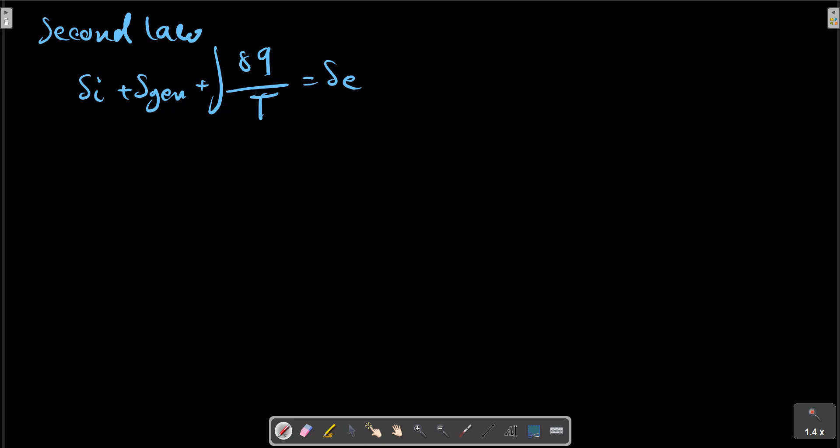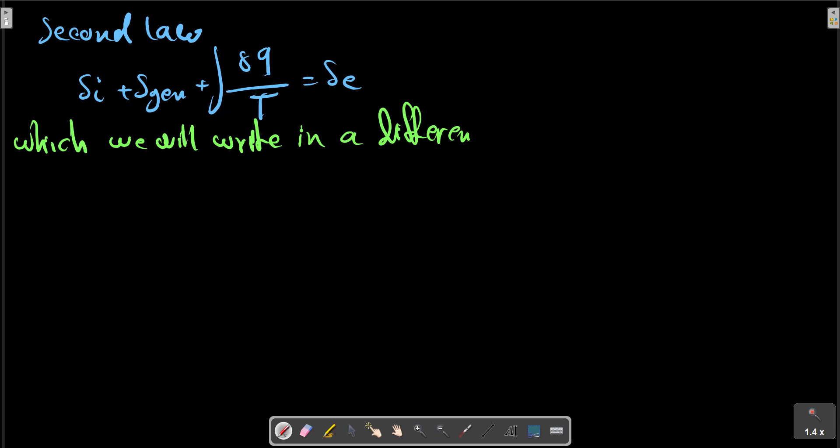And the second law: we have S_i plus S generation plus, which we will write in a differential form as, in a differential form, and we can calculate that delta Q is a path function, T dS minus T delta S generation is a path function also.

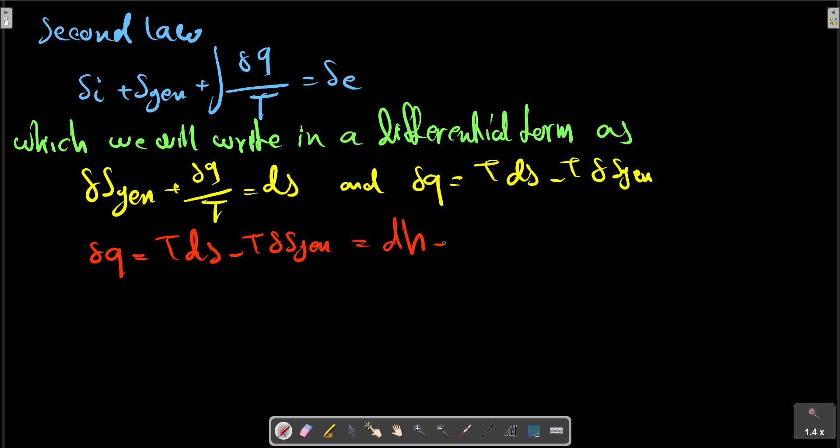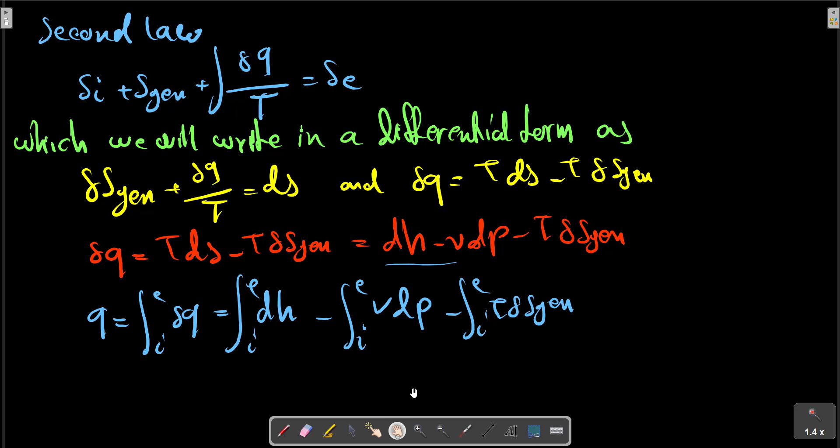To facilitate the integration and find Q, we use the property relation and get this equation as T dS equals dH minus v dP, minus T delta S generation. And we can obtain Q as this expression from I to E, which is equal to dH minus v dP minus T delta S generation, and equals H_E minus H_I minus the integral of v dP minus T delta S generation.

This result is substituted into the energy equation, which we solve for work, which was Q plus H_I minus H_E. This is Q, and also we have, with simplification, we can obtain this relation for work.

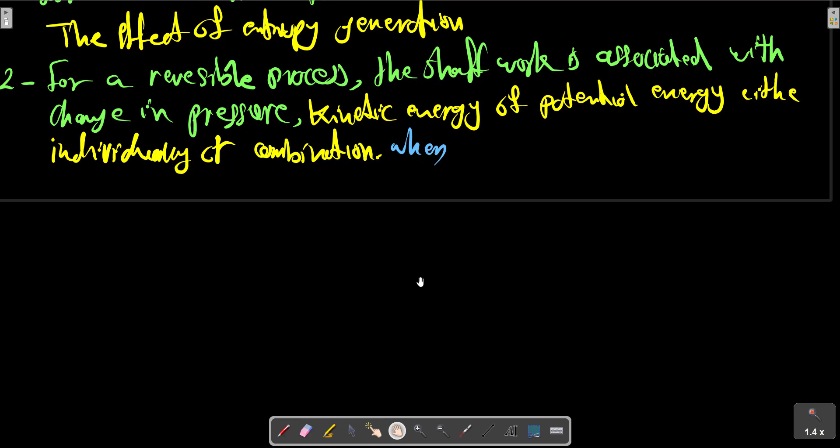For a reversible process, the shaft work is associated with change in pressure, kinetic energy or potential energy, either individually or in combination. When the pressure increases, work tends to be negative. Work tends to be decreased, negative. We must have shaft work in.

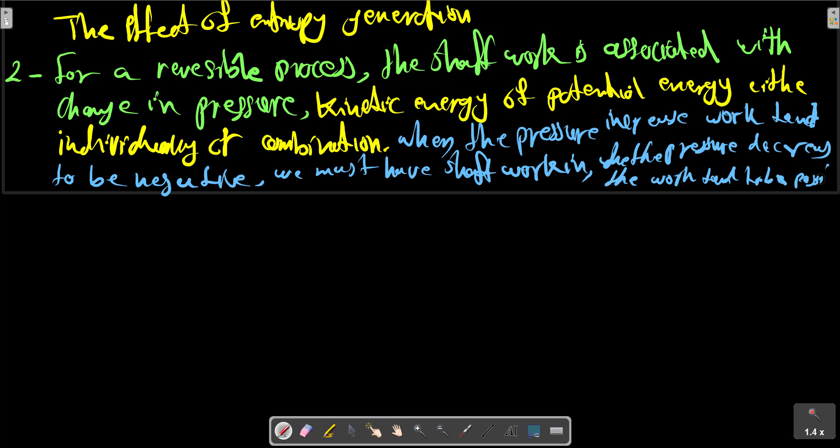And when the pressure decreases, the work tends to be positive. Pressure decrease, the work tends to be positive. Pressure increase, work decrease. Pressure decrease, work increase.

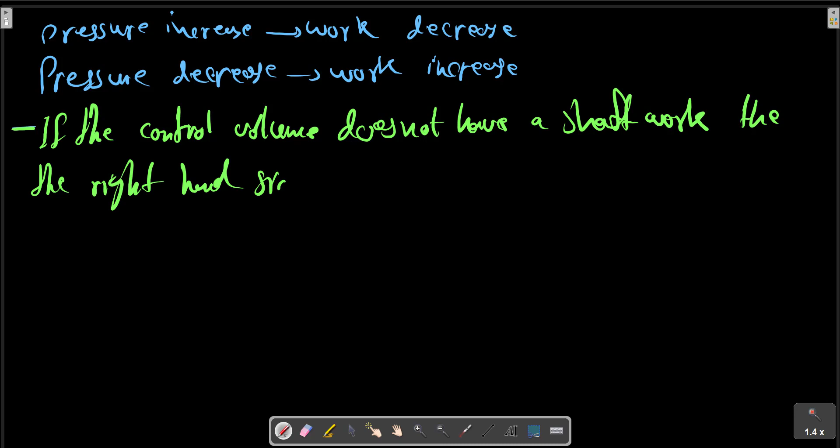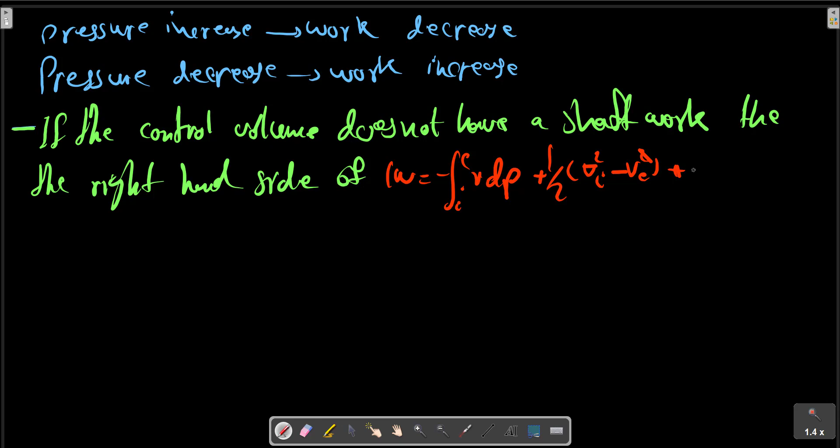The third one: the control volume does not have shaft work. Then the right hand side of the equation W equals... The right hand side of the equation must be balanced out to 0. Any change in one of the terms must be accompanied by a net change of opposite sign in other terms, and notice that the last term can only be subtracted. So then we have this relation equal to 0.

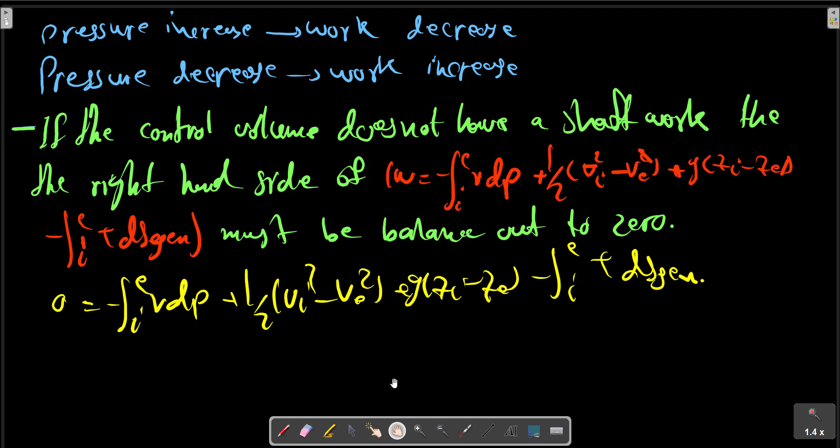As an example, let us briefly look at a pipe flow with no change in kinetic or potential energy. If the flow is considered reversible, then the last term is 0. For a reversible process, this term also is 0, and the first term must be 0 also. That is, the pressure must be constant, with no change in kinetic and potential energy and a reversible process; the equation gives pressure constant.

Realizing the flow has some friction and is therefore irreversible, the first flow term must be positive to balance out the last term. As mentioned in the comment above, the equation for the steady state process is useful to illustrate the work involved in a large class of flow processes such as turbines, compressors, and pumps, in which changes in the kinetic and potential energy of the working fluid are small.

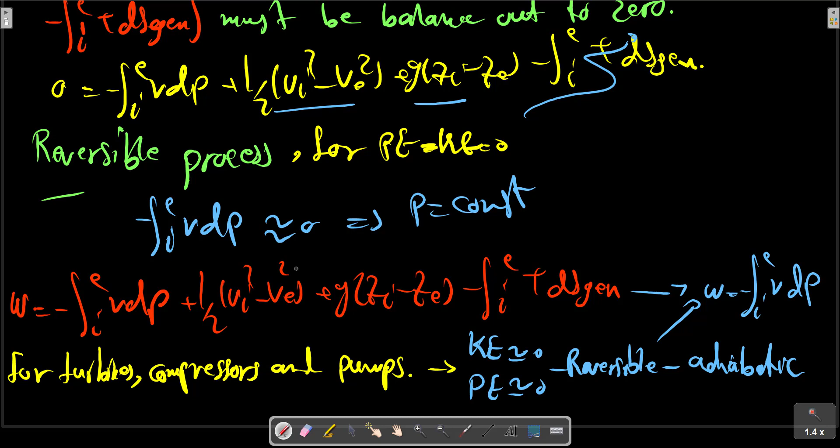The model process for these machines is also reversible: a steady state process with no change in kinetic or potential energy. The process is often also adiabatic. This expression reduces to minus the integral of v dP. From this result, we conclude that for a steady state reversible process with KE and PE equal to 0, for pumps, turbines, and compressors, we have this relation: W equals minus the integral of v dP.

From this result, we conclude that the shaft work associated with this type of process is given by the area of the PV diagram, for example the area between the P-axis and the PV curve. This is work. It is important to note that these results apply to a very specific situation of a flow device and are very different from the boundary type work, P dV. It was also mentioned in the comments that the shaft work involved in this type of process is closely related to the specific volume of the fluid during the process.

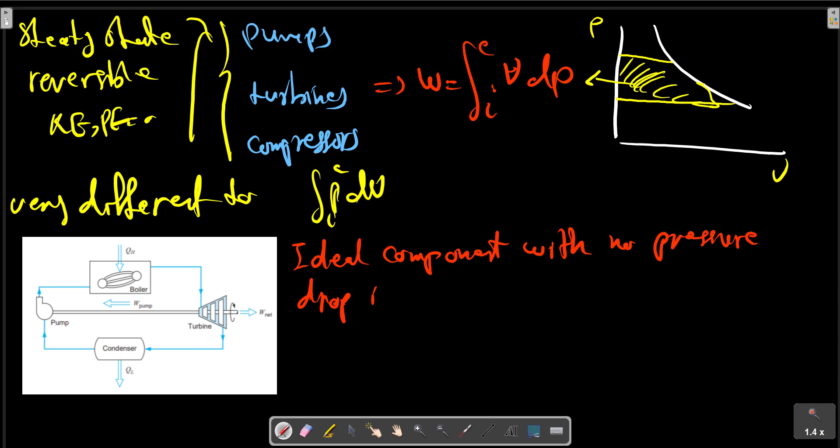To amplify this point further, consider the simple steam power plant as shown in the picture here. Suppose that this is a set of ideal components with no pressure drop in the piping, the boiler or the condenser. Thus the pressure increase in the pump is equal to the pressure decrease in the turbine. We have this relation: the pressure drop in the turbine is equal to the pressure increase in the pump.

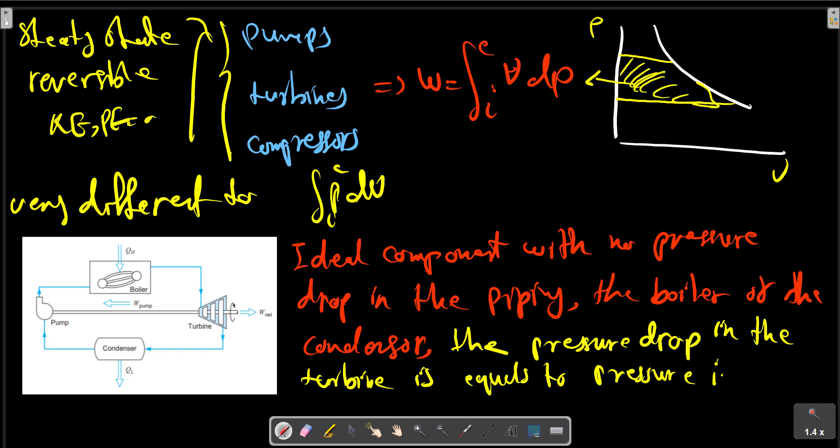Neglecting kinetic and potential energy changes, the work done in each of these processes can be expressed as minus the integral of v dP. Since the pump handles liquid, which has a very small specific volume compared to that of the vapor that flows through the turbine, the power input to the pump is much less than the power output of the turbine. The difference is the net power output of the power plant. The same line of reasoning can be applied qualitatively to actual devices that involve a steady process, even though the processes are not exactly reversible and adiabatic.

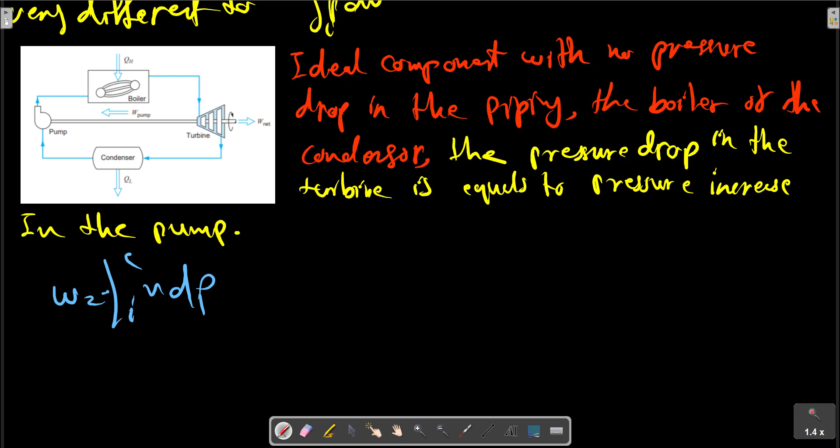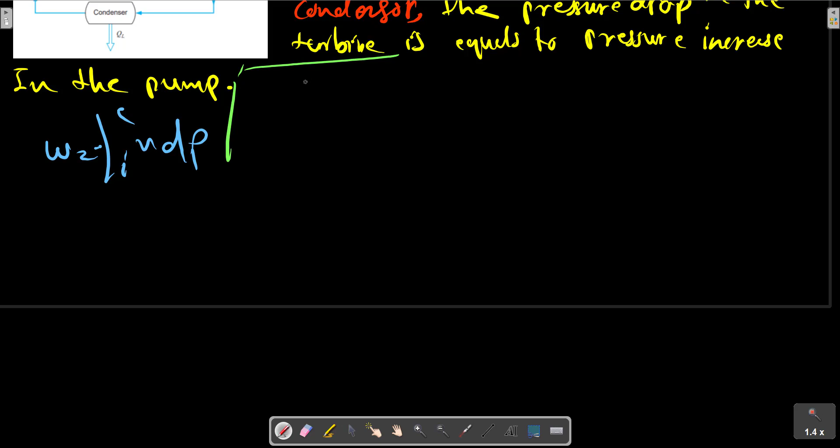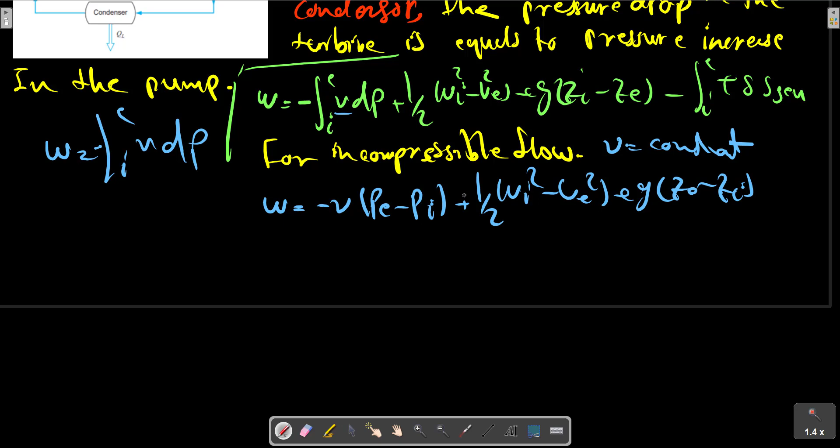A simplified version of the equation is for incompressible flow: W, the first term with v constant, incompressible and reversible. This is exactly what is called the extended Bernoulli equation, after Daniel Bernoulli, who wrote the equation for the zero-work term. From this equation, it follows that the sum of the flow work, kinetic energy and potential energy is constant along a flow line. For instance, as the flow goes up, there is a corresponding reduction in kinetic energy or pressure.

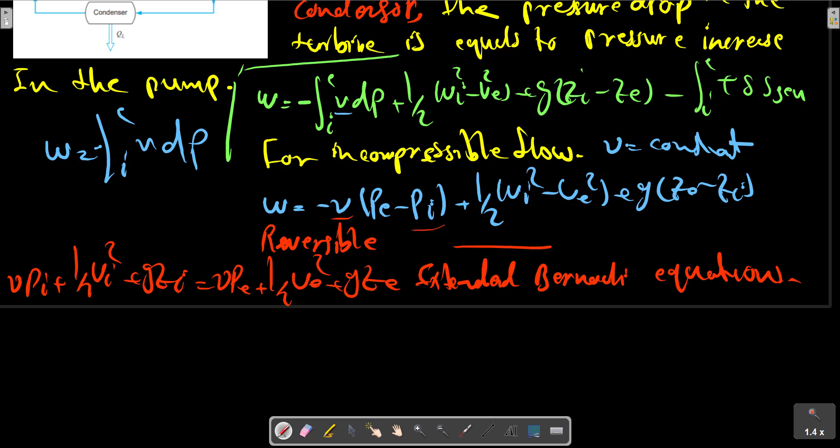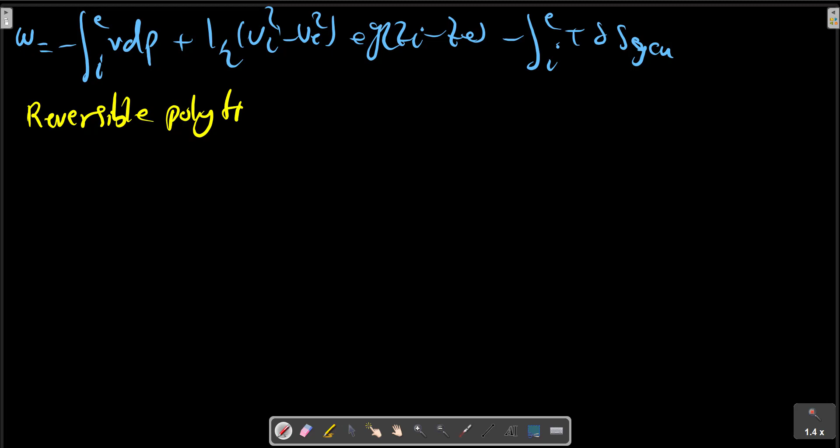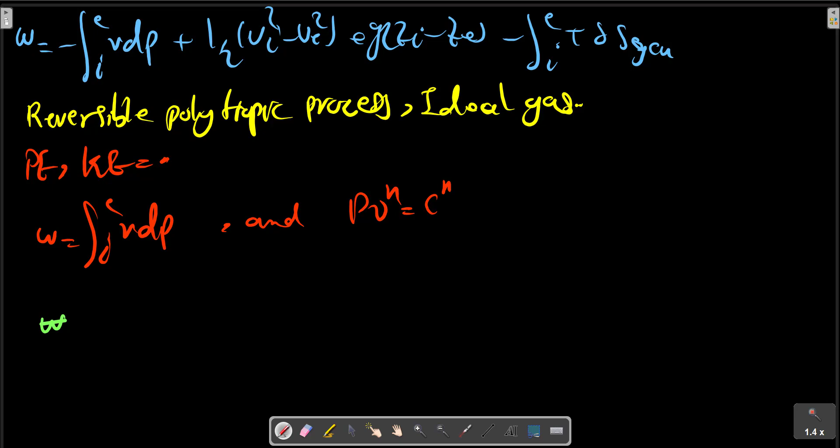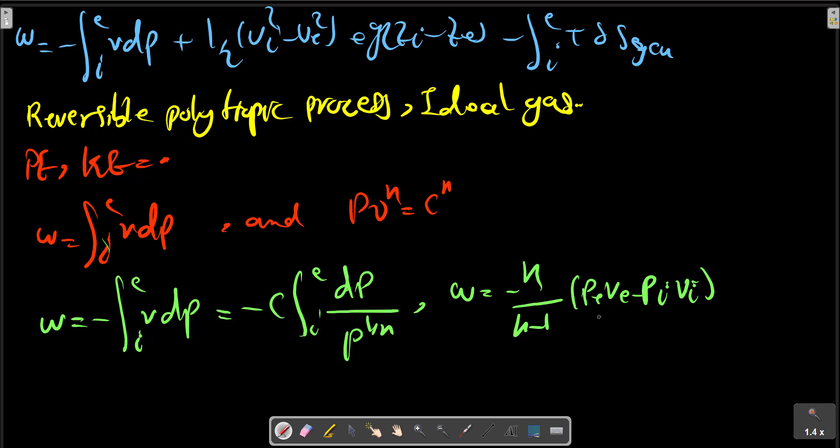As a final application for the relation with no entropy generation, we recall the reversible polytropic process for an ideal gas discussed in the previous section for a control mass. For the steady state process with no change in kinetic and potential energy, we have W, or W equals this, and if the process is isothermal, n equals 1.

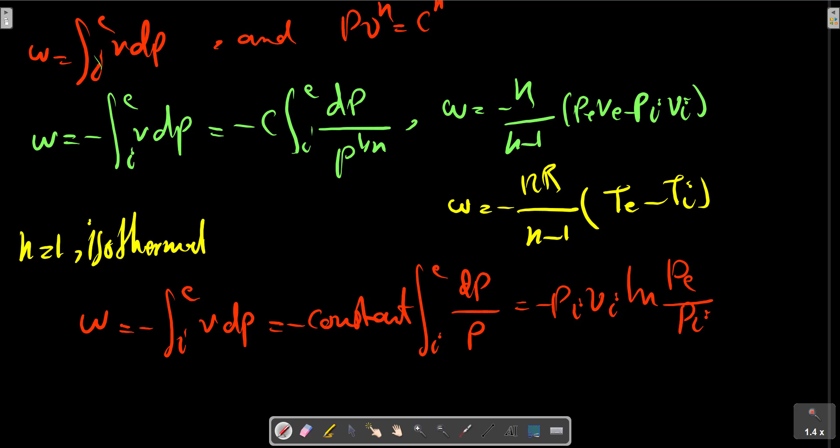The principle of increase of entropy, the next section.